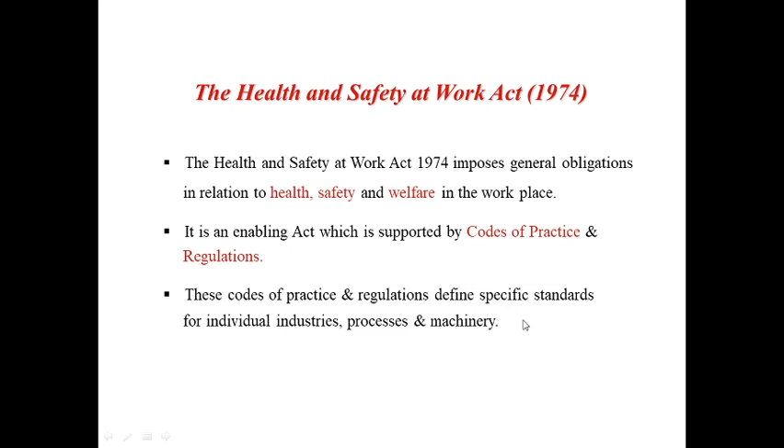And these documents are then specific to your individual industry, processes and machinery that you're going to be using, so they give you a bit more of a clear guidance.

The objectives of the Health and Safety at Work Act is to ensure health, safety and welfare of people at work, as you'd expect and as the name suggests. It's also there to prevent risk to the general public arising from workplace activities.

So just for a second, if you consider your workplace, think about how your workplace could potentially be putting members of the public in danger, and consider the precautions that are being implemented to account for those risks, to account for those individuals.

Obviously these have been put in place by the employer to reduce the likelihood of injury to members of the public. The last point on here is then to control the use of hazardous materials in the workplace.

So if you are dealing with hazardous materials such as flammable gases or corrosive materials, they need to be handled and stored and transported in a way which doesn't bring around risk to individuals, as per the Control of Substances Hazardous to Health guidelines.

Okay, we'll get into the nitty gritty now. So this is section 2. This is the employer's responsibility, and it goes through and states that the employer needs to, wherever reasonably practicable, do the following.

Reasonably practicable means that they need to work out whether it's financially viable, what sort of effect is it going to have in the workplace. So, for example, providing everybody with rubber gauntlets, or abrasive protecting gloves to avoid paper cuts in the workplace might not be a reasonable thing to do, whereas to give people abrasive protective gloves when handling abrasive wheels, or using angle grinders or chop saws, for example, that is deemed reasonable.

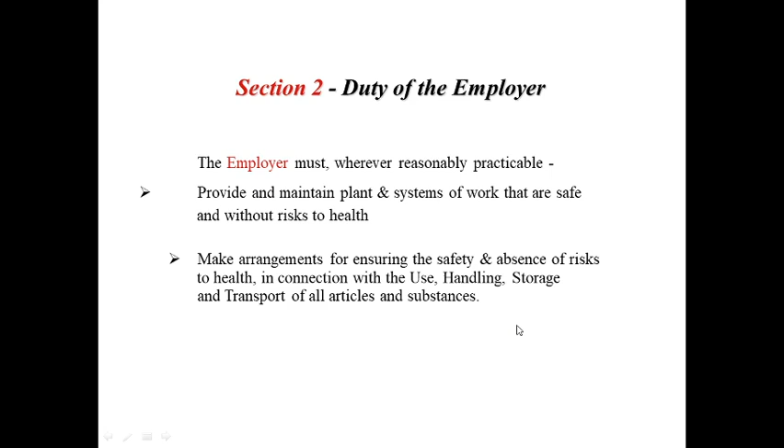The employer also then needs to provide information and supervision, ensuring that people are aware of the correct methods of practice and they are supervised when doing that. Training and instruction, so this presentation is contributing to your training, and instruction would be what you'd expect to receive moving forward.

Ensure the health and safety of employees and visitors. This sort of goes without saying, and as the legislation title suggests, it's the employer is required to make sure people are safe within the workplace, and ensure that places of work are safe from risk to health. So we're talking about no exposed asbestos, no open flames, those sort of things.

Also provide risk-free means of access and egress, so anybody on site is able to, if at any point needed, exit the premises without any sort of physical hindrance, i.e. nothing pushed up against the fire door, forklift trucks not parked on pedestrian walkways making them inaccessible.

We've then got provide facilities and arrangements for welfare at work, so safe drinking water and toilet facilities, those sort of things, and then prepare and publish a written safety policy. So the employer is legally required to go through a risk assessment and establish what hazards there are in the workplace, and then implement some sort of precautions to ensure that the risk of that is limited, and then obviously they need to publish this so people on site are aware of that. So that's the employer's responsibility.

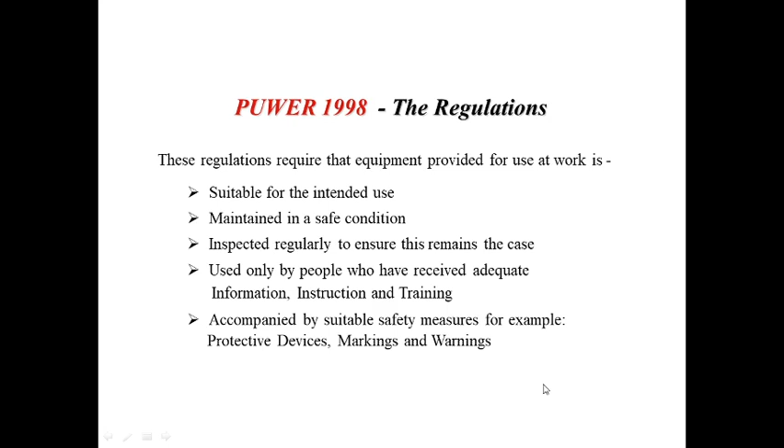And then we've got LOLER. So LOLER is a bit more specific now to forklift trucks, in that it's talking about lifting operations and lifting equipment regulations, whereas PUWER was talking about all work equipment. LOLER is talking about only those which have a lift function. So for example, we're talking about forklift trucks, we're talking about stair lifts in care homes, we're talking about elevators in hotels. It covers a whole range of different things.

Now what this states is the equipment would need to be strong and stable enough for the particular use. So as part of your pre-use check sheet, you go through and establish whether the condition of the vehicle is strong and stable. So if we look at the strength of it, if we look at the forks, for example, if there are cracks or defects in the forks, if it's bent or twisted, that might indicate that it has insufficient strength.

As part of the test that an engineer would come in and do, they would check the thickness of the fork and ensure that the fork heel has not been worn down by more than 10% of the fork face. So if the fork face, or the back of the forks, is 100mm, then it's expected that the heel of the fork would be at least 90mm. If it's below 90mm, then the fork should not be used because they are insufficiently strong.

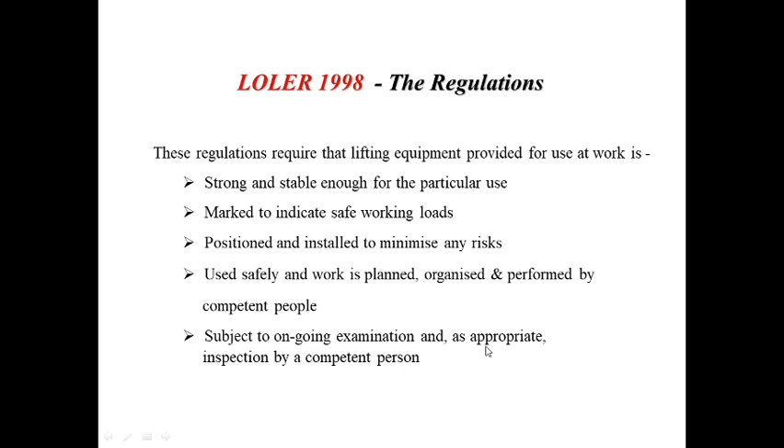The frequency of these checks, as appropriate, would depend on the vehicle. Vehicles lifting people up in the air, any lifting equipment which lifts people, will need to be checked on a more regular basis, a minimum of every 6 months. So if you have a non-integrated working platform, or lifting cage, that cage and the vehicle lifting it would both need to be checked within the last 6 months. I hope that makes sense.

Now, if there is an issue within the workplace, the Health and Safety Executive would come in and perform an investigation. If we're talking about an incident in the workplace, this would need to be reported under the Reporting of Injuries, Diseases and Dangerous Occurrences Regulations, or RIDDOR, and the Health and Safety Executive would then determine whether it was necessary to investigate or not.

If they did feel it was necessary, they would come in and establish whether there was any sort of negligence which resulted in the accident occurring. They would perform inspections, take witness statements and so on, and potentially carry out enforcement functions where required.

Up until 2008, it was the Health and Safety Commission who actually produced the regulations and codes of practice, and it was the Health and Safety Executive who then enforced them. But now the Health and Safety Executive perform both roles, as these two bodies have merged.

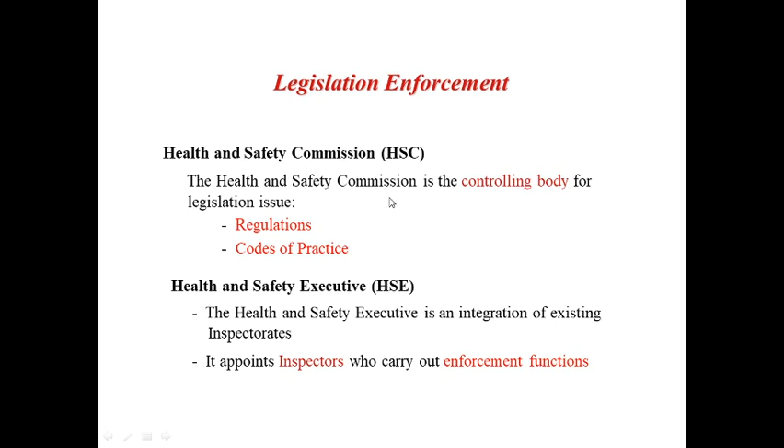What are the basic principles for lift truck stability and safety? We'll run through a couple of things here, looking at these 5 different points, starting with the seesaw principle.

You can see there's a load here of 100 kilos and a counterweight here of 100 kilos. The fulcrum is positioned equidistant from both points, so it's balanced. However, this is also balanced, so despite the weight being considerably higher here, because the weight distance from the fulcrum has been reduced, this is the same downward force as what the counterweight would produce.

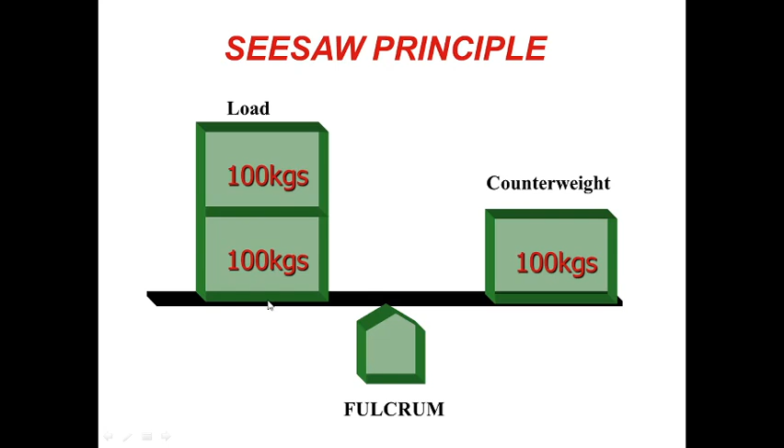So if we wanted to cause this load to tip off for whatever reason, we would need to pull it further forward towards the end, and that would cause it to tip. Hopefully this has made it clear that you can carry a heavier load safely as long as it's closer to the fulcrum point. For a forklift truck, that would be closer to the heel of the forks, which is why we need to make sure the load centre is as small as possible.

Regarding that, it would need to be the centre of gravity of the load that we're referring to. The centre of gravity is the point at which an object's weight is balanced in all directions. So if we're talking about a solid concrete block, it would be slap bang in the middle of it, assuming the weight is distributed evenly.

Cylinder, exactly the same, it's slap bang in the middle.

However, what may happen is if we're dealing with a box or a pallet, if the weight inside is able to move around freely, like a pallet of stones or pebbles, then obviously the pebbles may be unevenly distributing the weight beyond just one side. So we need to consider that when performing a lift, to ensure the centre of gravity isn't too far towards the tips.

So if the pallet was being picked up from this edge, then you'd want the centre of gravity to be closer to this side. So if the weight is all over this side, then you'd need to enter the pallet from this direction, not from this direction.

If we're dealing with a cylinder, often we use barrels and they will contain liquid. Then we're dealing with a live load, similar to what I've just described. A live load is anything that has the ability to move its centre of gravity. Highlighted more specifically with cylinders because we're talking about liquid, and the nature of it is more fluid and more prone to moving around easily.

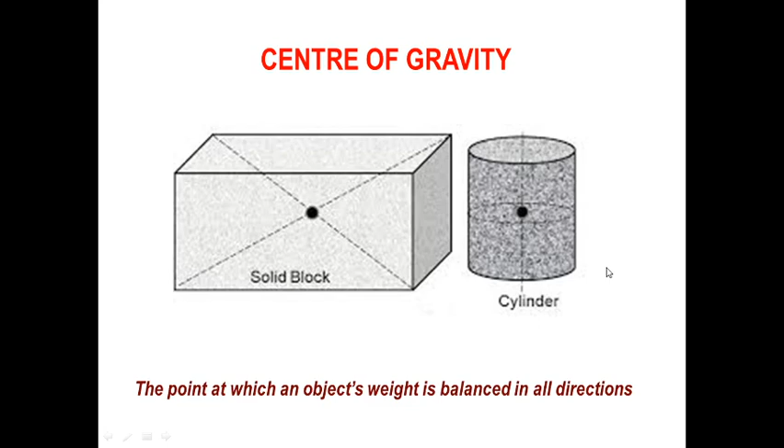So obviously you need to make sure you're operating more cautiously when doing that. Right, so we need to be aware of where the centre of gravity is in the vehicle. With this being a counterbalance truck, it's the same with a reach truck, the weight is nearer the back of the vehicle.

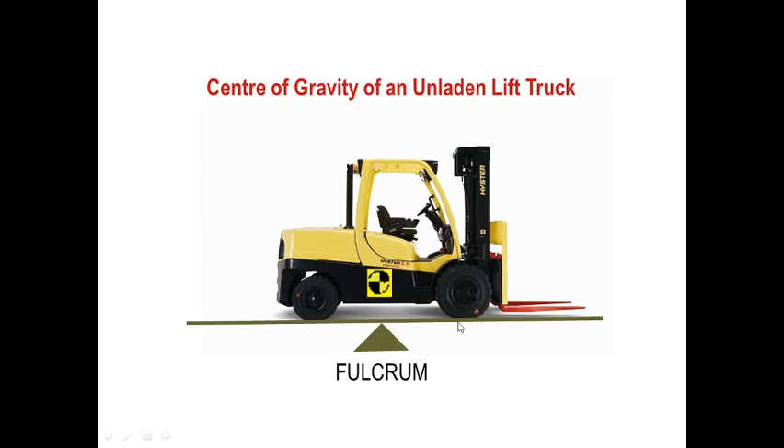So when we add a load, what's going to happen is the load brings the centre of gravity of the vehicle plus the load, i.e. the combined centre of gravity, further forward. We need to ensure that adding that load doesn't bring the centre of gravity too far forward, because if it brings it outside of the base of the vehicle - the base being between the wheels - then that's going to end up tipping the vehicle forward.

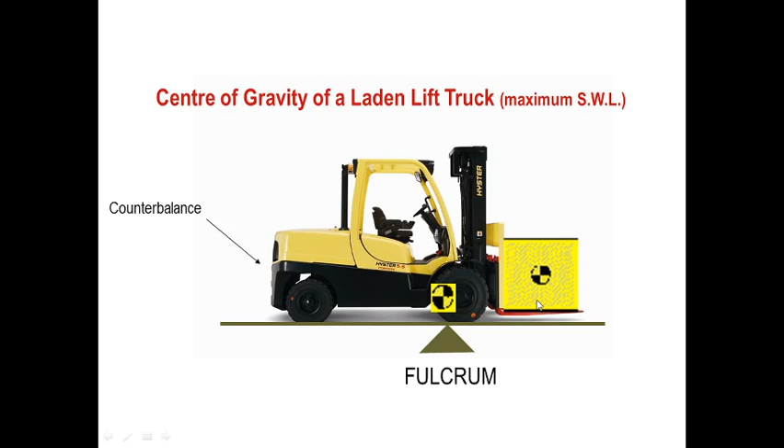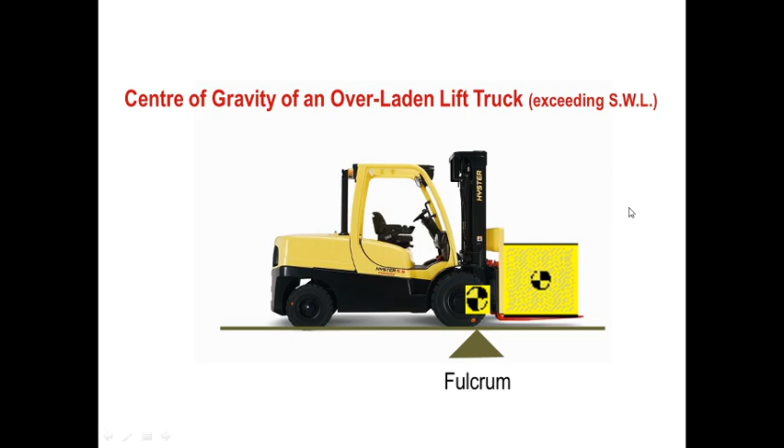So the load weight cannot exceed that of the counterbalance without tipping it over. If, for example, it goes too far forward like this, it's then exceeding the safe working load of the vehicle, and the truck is deemed overladen. So what we need to do is make sure the centre of gravity stays over the base.

Really easy. If we're dealing with live loads, like you can see this is 4 individual units stacked up, then we would need to make sure these are banded to reduce the likelihood of this happening.

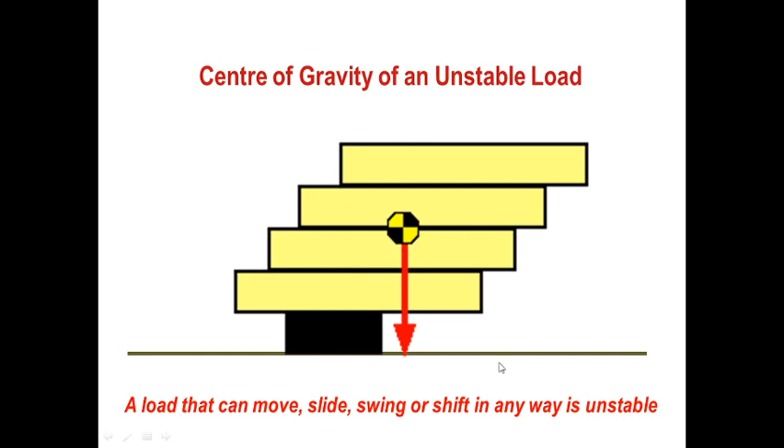So the stability triangle, this will be described more in the video that you'll watch later. The stability triangle is the footprint or the base of the vehicle. So from point A to B to C, this is where the centre of gravity needs to remain.

With the nature of this being narrow at the back, with the centre of gravity here closer to the back, it's easier to cause this to come outside of the triangle to the left and right of the vehicle, as the operator would look at it. So placing a load on the front would cause the centre of gravity to shift forward and give the vehicle better lateral stability, left and right, because the centre of gravity moves further forward and has a greater distance to cover to move outside of that triangle.

The further forward this goes, the less longitudinal stability it has, longitudinal being this plane of forwards to backwards. If this was further forward here, it would only require a slight movement further forward to then come outside of the triangle forwards. I hope that's clear.

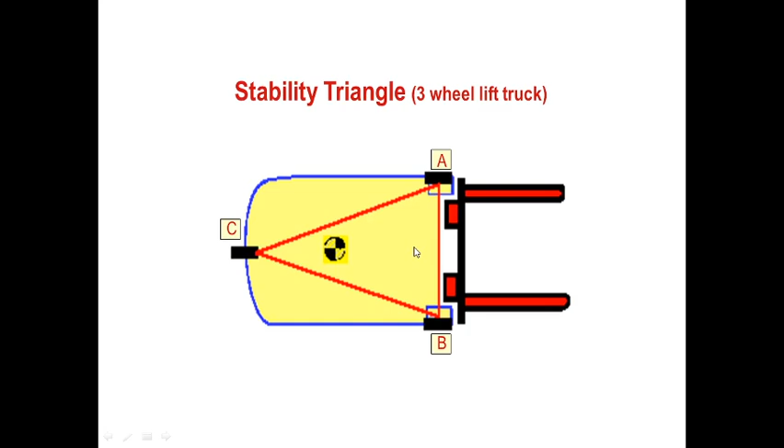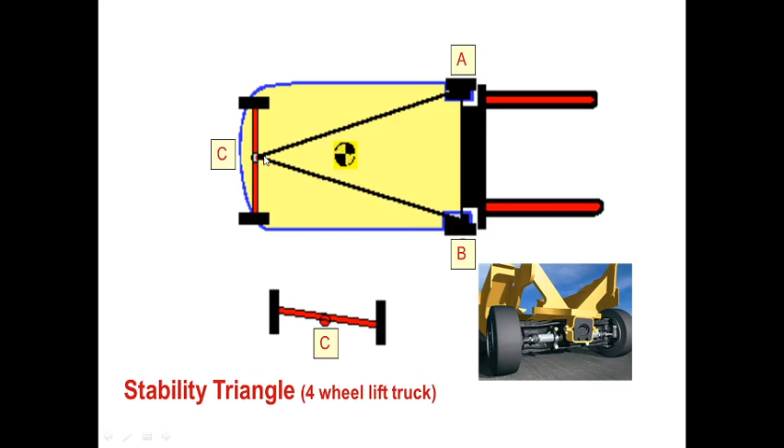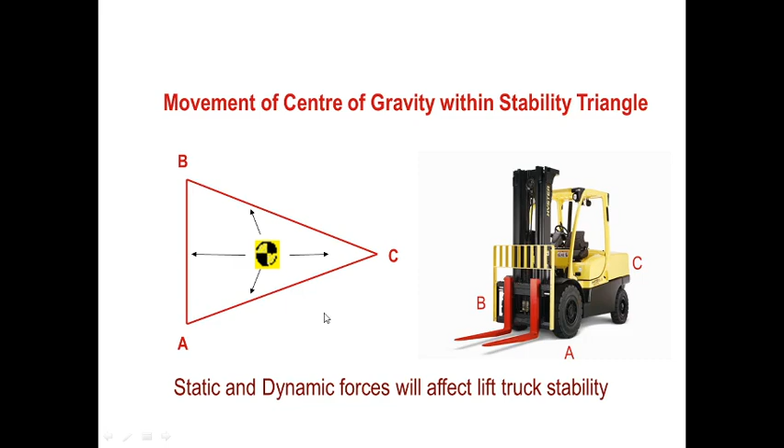This is the point I've just mentioned regarding this rear axle, so it's a triangle because of this rear axle. Movement of the centre of gravity within the stability triangle is going to affect the stability, so we need to be aware of how and why that occurs.

So there are an array of different forces which affect the vehicle. Lifting or lowering the load can affect the centre of gravity, particularly if it's done in an aggressive way.

The higher you lift the load, the more exaggerated the movement that occurs. So if you lift up and then tilt further forwards, the forwards movement would be exaggerated because the loads are much higher. So obviously you don't want to be driving along with the load up in the air.

Use of side shift - this is very important. You need to ensure that the side shift is within the middle, or at the centre point before operation. If you've got the side shift all the way over to the left and the weight is further over to the left, performing a turn to the right hand side is going to cause the truck to be more likely to tip over to the left.

Accelerating or braking - I hope this is obvious. Braking harshly is going to cause the truck to tip over more likely anyway. If you were to be turning sharply or at speed, this is going to increase lateral instability, so that would be advised not to do.

Driving on slopes or gradients - you need to ensure that the orientation of the vehicle is correct. If you're driving with a load up a hill, you'd want the load to be facing uphill irrespective of the direction of travel, so the load would always face uphill. If you're driving up the hill, you'd obviously be driving forwards. If you're driving down the hill, you'd want to be reversing, to ensure the stability, traction and adhesion of the vehicle to the road and of the load to the vehicle, so it's less likely to lose the load or the truck to tip over.

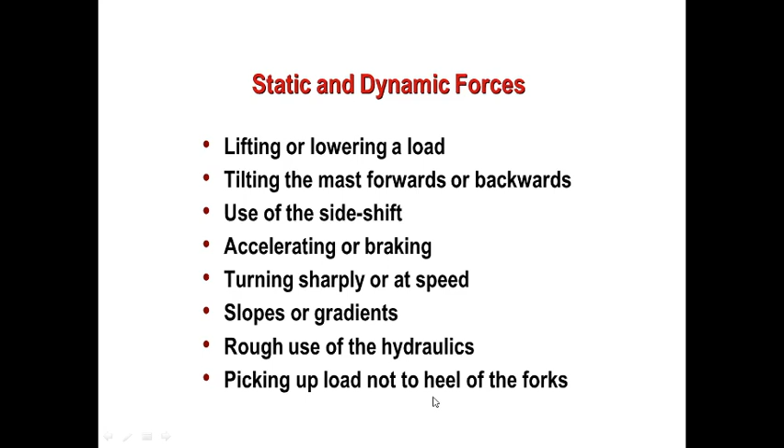Rough use of the hydraulics - any rough or disjointed movement is going to increase the likelihood of the load tipping over. And the last point, picking loads up not to the heel of the forks - as described earlier, this is what we call undercutting. If the load is undercut, it's increasing the load centre unnecessarily and increasing longitudinal instability, increasing the likelihood of the load tipping off.

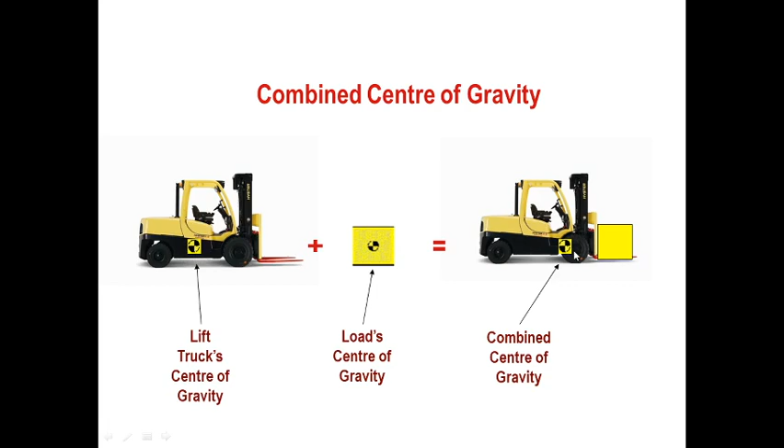Combined centre of gravity is the centre of gravity of the truck plus that of the load, giving you the combined centre of gravity, as you can see here. As the combined centre of gravity moves forwards, from E towards F, the more likely the load is to tip off and the truck to tip over.

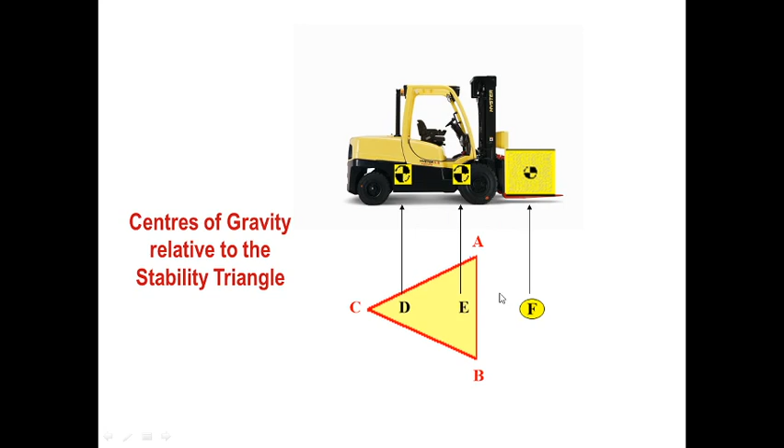Sideways instability - we need to consider what factors could affect that. So what are they? Well, we'll go through that in just a second. Longitudinal stability - exactly the same, you need to always consider what the longitudinal stability factors are when you are operating.

Based on this image, looking at the direction of the vehicle and this stack, it's clear to see that the centre of gravity of the load has caused the combined centre of gravity of the load and the truck to move too far forward outside of the footprint of the vehicle, and it's going to cause it to tip over. So what factors might have caused this to happen? One of them could have been going down the slope as described previously. The correct way here would be to turn the vehicle around and either reverse down or drive forwards up the hill.

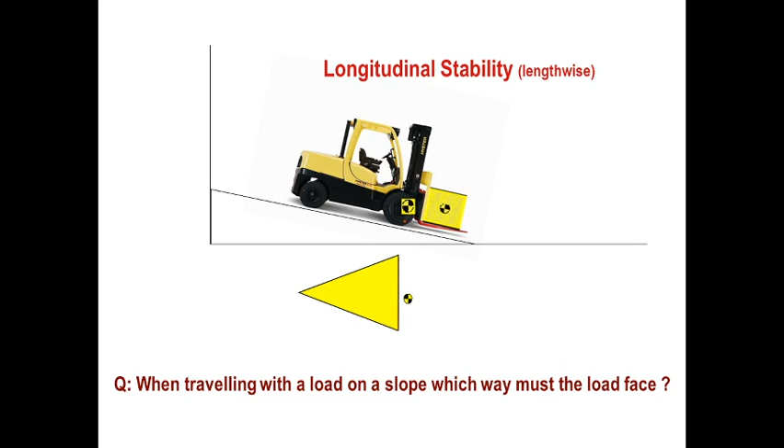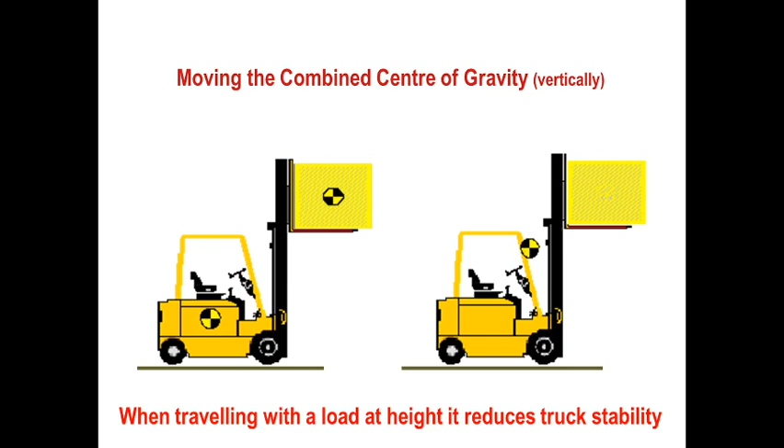You can also cause the centre of gravity to be elevated, and it's going to increase the likelihood of the truck tipping over. So when travelling with a load at height, it reduces the truck's stability, causing it to be more likely to tip. This is even more dangerous when turning with the load in the air as well. So you need to be aware of the limitations of the vehicle.

On any vehicle there should be a clear, legible, clean and accurate rating plate. The rating plate goes through a whole range of bits of information, but what we're going to look at right now is the lifting limitations.

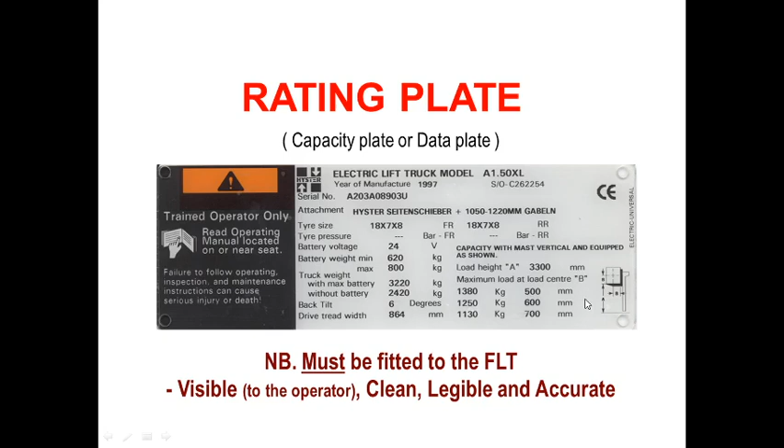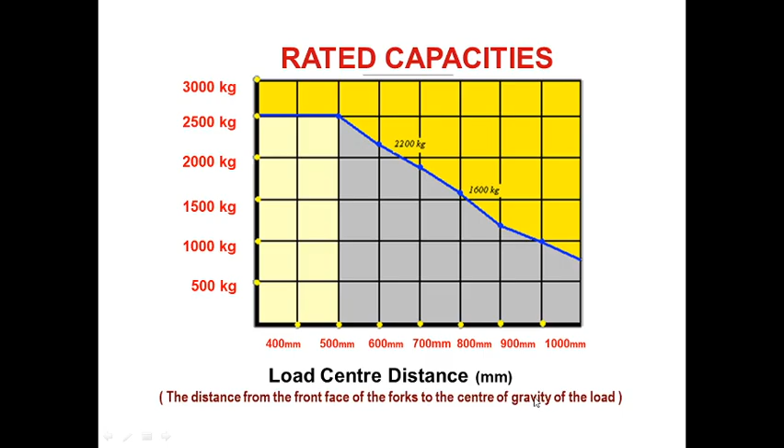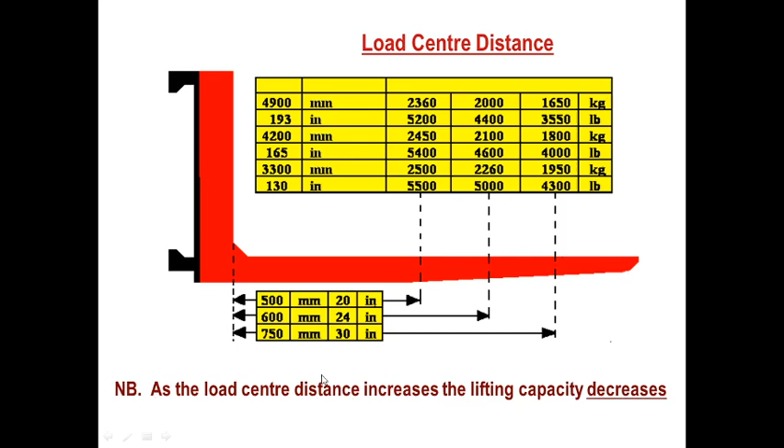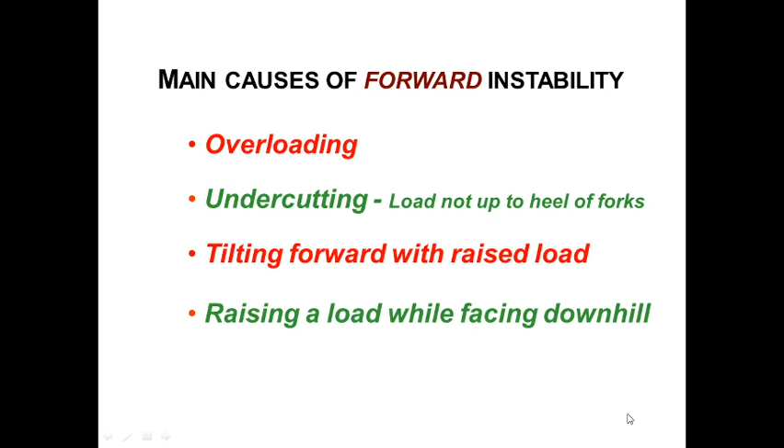Raising a load whilst facing downhill - we don't want to do that. We always want to make sure we turn around so the load is facing uphill. We've then got harsh sharp braking, rough use of the hydraulics, traveling the wrong way on a slope, which we've just mentioned, and hitting overhead obstacles - try to avoid that, make sure you're always looking up before you move.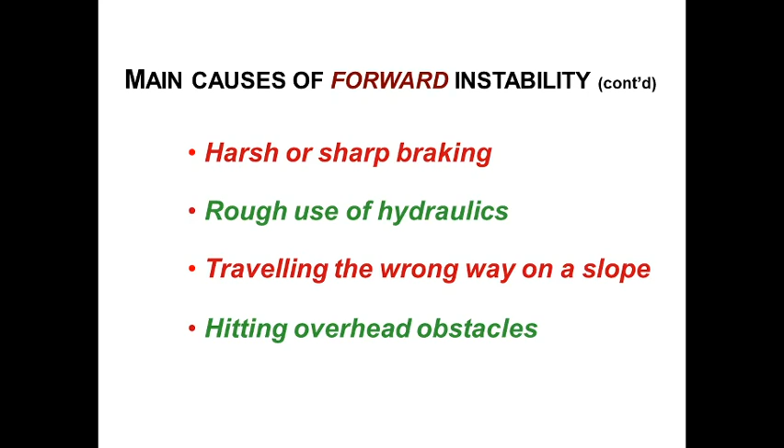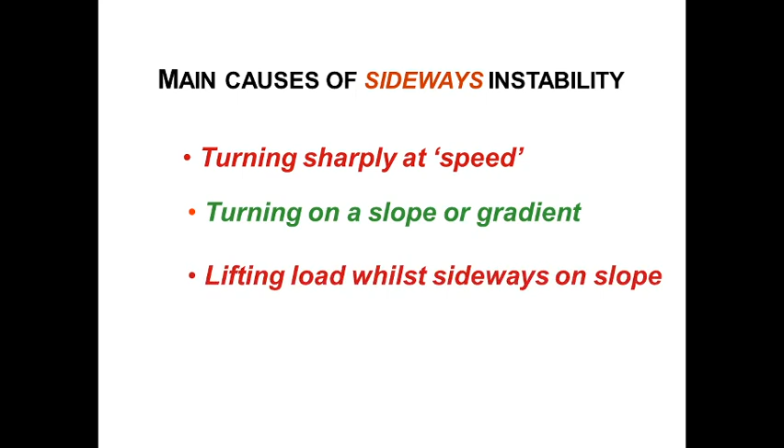And then we've got sideways instability as well. So we're talking about turning sharply or turning at speed, turning on a slope or gradient, lifting a load whilst sideways on a slope, driving over obstacles or similarly driving into potholes, turning with a raised load. That's the primary cause of trucks tipping over and operators becoming severely injured.

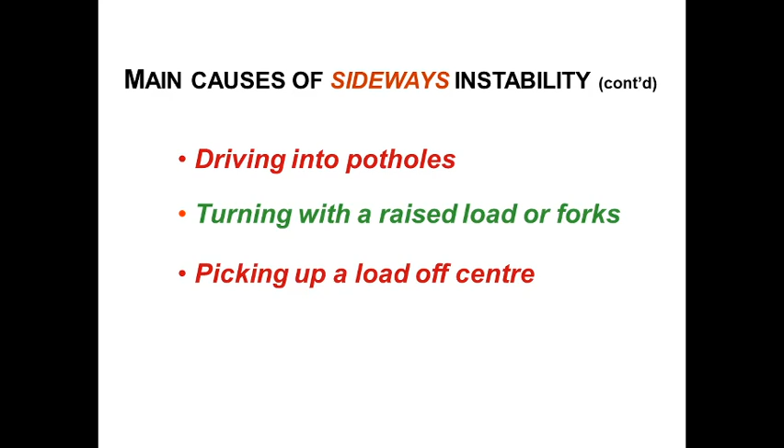We then have picking up a load off center. You'd always want to make sure the load is centrally placed on the forks, the weight is evenly balanced, those sort of things. Incorrect use of side shift - again, always in the middle to avoid lateral instability.

And then we've got traveling with a live load. Importantly, a live load can cause instability in both the forwards and backwards direction, as well as left and right direction, so longitudinal and lateral. It just depends on where the load happens to shift. So if we're talking about a bag of sand, that can obviously swing around all over the place if the forks are through the hoops.

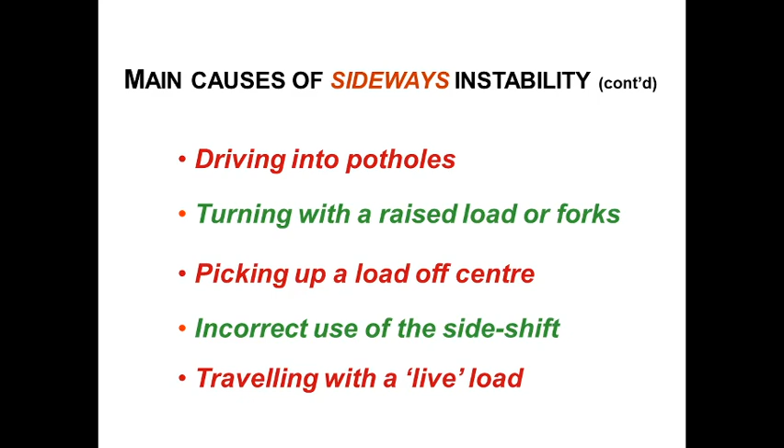Now remember, if you are operating a forklift truck, an unladen forklift truck, a truck carrying no load, will tip over to the side more easily than a laden lift truck with the load in the correct travel position. Because of the stability triangle we saw earlier, it's narrower at the back. If you put a load on the front, it pulls the combined center of gravity of the truck and the load further forward where the triangle is wider, so it's less likely to move outside that triangle. So carrying a load makes the truck more stable laterally than a truck without a load, and it may very well cause this to happen.

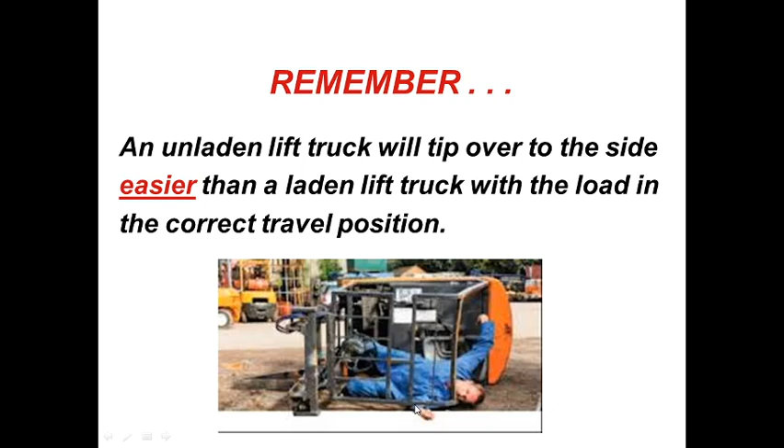This is what they call the mouse trap, where the rollover protection system actually pinches the operator's limb. You need to make sure this doesn't happen. You go about doing that by making sure you stay within the confines of the truck, and also brace your feet, hold on tight, and lean away from the point of impact. On some vehicles they'll have handles for you to hold onto when doing that; more often than not it's just going to be the steering wheel. I would strongly suggest holding onto the steering wheel and leaning away from the point of impact.

That rollover protection system is there to save you in this situation. So if the truck tips, it's not going to roll, it's simply going to land. It's going to do a 90-degree tip, hit the ground, and then you're safe, as long as you do not try and jump out of the vehicle or jump out in the opposite direction. So do not jump out of the vehicle regardless of the situation.

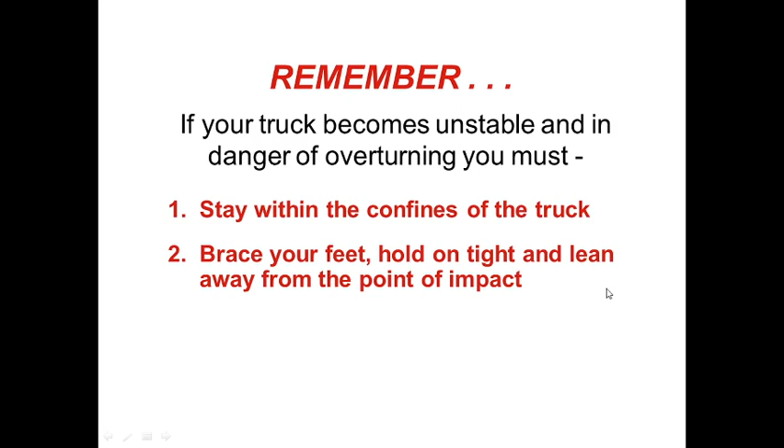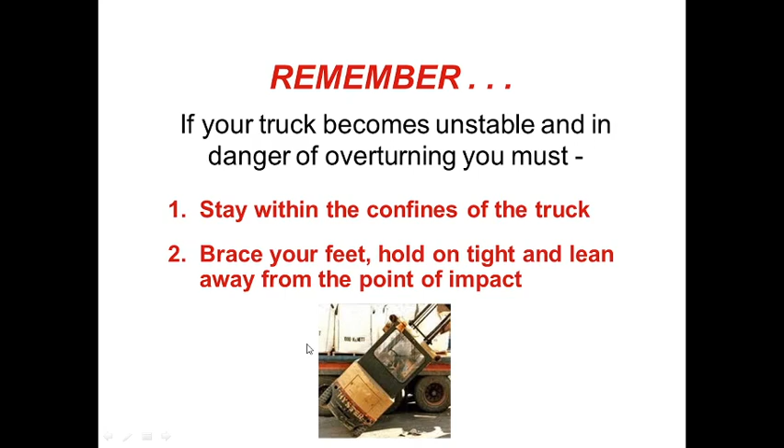There we go, let's avoid that. In this instance, you'd want to make sure that you stay within this. You wouldn't want to try and jump out here, because if you do, this overhead guard is potentially going to pinch you. And if you try and jump out this way, what may very well happen is your shift of weight may cause the truck to tip back this way and then cause you to be caught as well. So it's just best to stay within the confines of the vehicle.

Now very quickly, just to finish, there's some data from a few years ago put forward by the Health and Safety Executive, and they stated that forklift trucks were involved in 24% of all workplace transport accidents which resulted in injury, which is quite a considerable amount. In that year, it was 8,000 incidents, and that was a 5% increase on the year previous to that. So due to more online shopping, it seems relatively reasonable that there'll be a lot more logistics involved, a lot more forklift operations, and therefore probably more accidents.

But that's just what I imagine, there's no sort of stats on that. In that year alone, there were 8 fatalities caused by forklift trucks, which is equivalent to 1 every 6 weeks, which is crazy. In that year, 360 major injuries such as fractures and amputations, 906 serious injuries where people required more than 3 days absence from work, and these rates of accidents would generally increase from September.

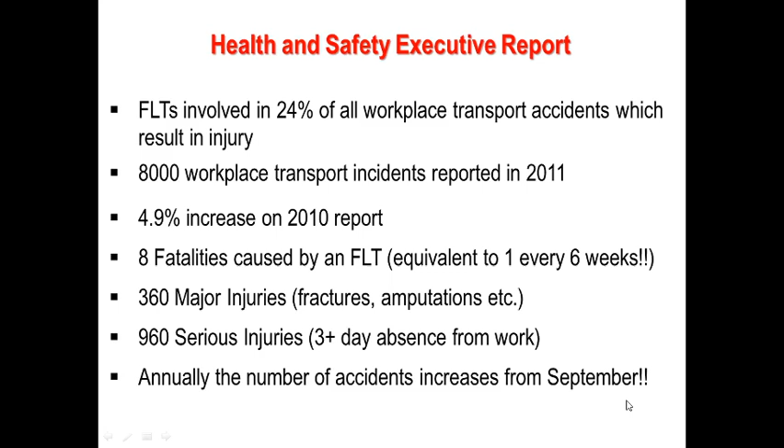So it might be worth considering some of the reasons why that may happen. Places becoming busier, people working longer shifts in the run to Christmas, those sort of things. It's an interesting point to consider. It gets darker, weather becomes worse maybe. There's a whole wealth of different reasons why that may be happening.

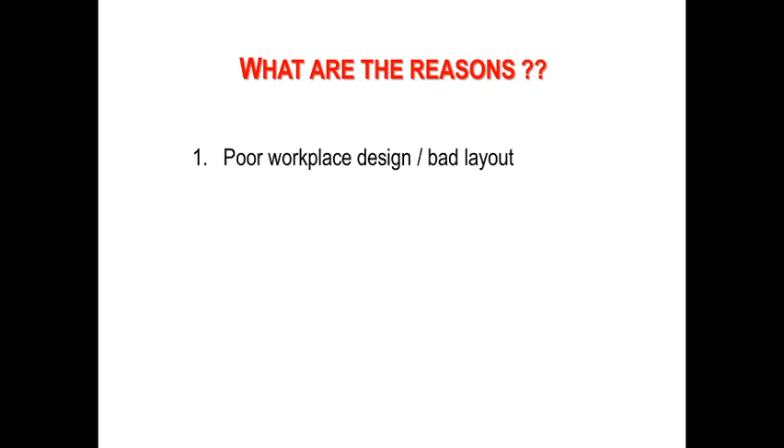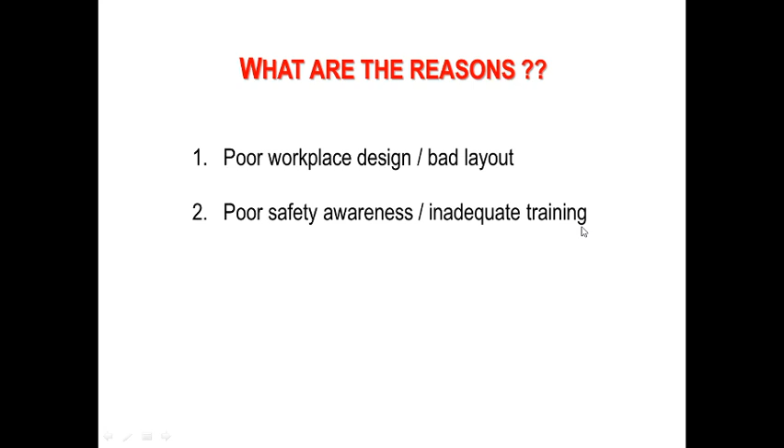Some of the reasons for accidents generally: poor workplace design or bad layout, maybe insufficient labels or warning signs, pedestrian walkways not marked out clearly, poor safety awareness and inadequate training, so people not being aware that there are forklifts operating in the area or knowing how the forklifts are going to be operating. Operators not knowing how to operate safely, not knowing how to use the horns, not going through pre-use checks, those sort of things. Fork height is another major one people often get wrong.

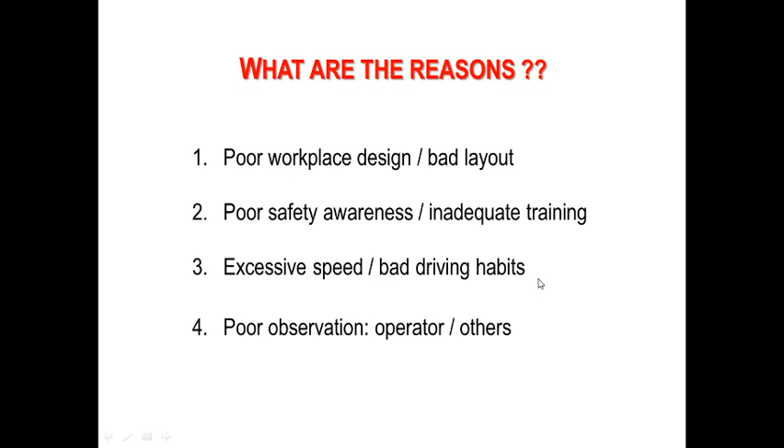Excessive speed and bad driving habits, that goes without saying. People driving too quickly are far more likely to have an accident. And then we've got poor observations. This can be both the operator and also pedestrians. So these are some of the primary reasons why people do have accidents in the workplace.

Other consequences of this: injuries, as we've seen in the statistics highlighted, potentially prosecutions, and ultimately fines and up to potentially 5 years in prison. So we are dealing with potentially some really serious consequences, so it's always best to make sure that you operate safely, nice and easy.

So the key take-home messages from this: make sure you perform good observations at all times. Do not use the hydraulics when moving. Instead, you'll want to stop, apply the handbrake and select neutral to ensure that the truck's not moving. There you go. And then operate the hydraulics smoothly, not in a disjointed manner. Obviously, using rough hydraulics is going to increase the likelihood of the load tipping off.

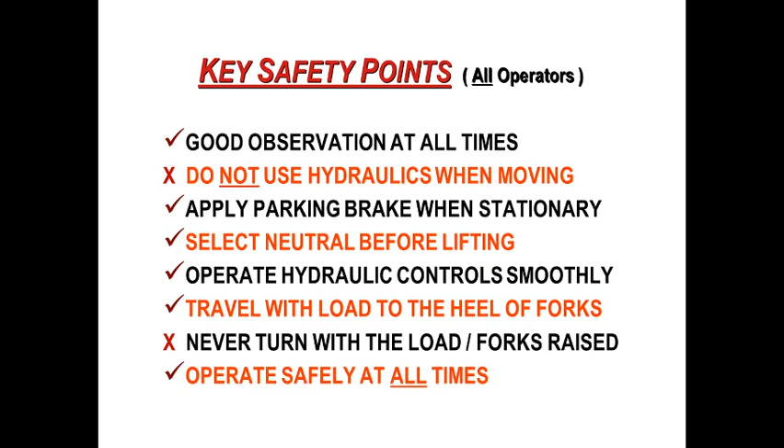Travel with a load to the heel of the forks so the load is not being undercut. You don't want to increase the load centre because that's going to reduce the stability of the vehicle, increase the likelihood of the load tipping off and the truck tipping forwards. And never turn with a load or forks raised. Again, the primary cause of trucks tipping over, particularly dangerous. Do not do it. Operate safely at all times. Why? A good operator is a safe operator.